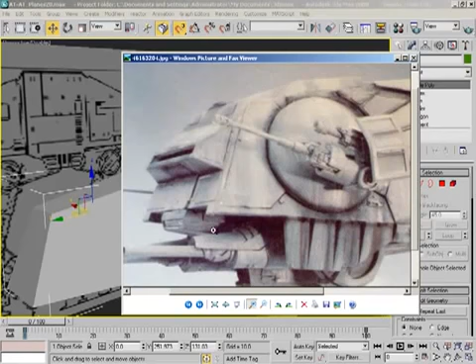So that's how I'm going to build it. We're going to build this one piece at a time, starting with the lowermost object and working our way out, stacking objects on top of it. That'll help give that sort of greebled, very Star Wars-y effect.

Let's start off by framing up on this thing. The first thing I'm going to do is hit the 4 key to go over to polygons, and I'm going to delete out this polygon here on the bottom. The reason I'm doing that is that if you look right here, there's kind of some walls to this box, but the underside of it indents inward.

And we can see that in other pictures - you can get an idea of it here. Here you can see that the underside of the head sort of recedes up inward a little bit, like these sides come down around the outside of it.

There's another shot I have right over here, where you can see the underside is really a plate that's recessed inward. So we'll create that a little bit later - for now, we're just going to worry about the overall shape.

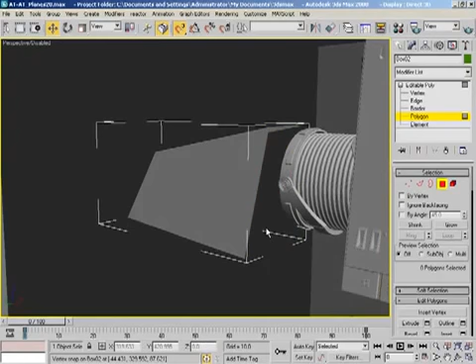We're also going to take out this plate. Let me take a look through some of my pictures here - we have the head, the main body. There's a specific one, I think, yeah, this one.

Here we go. You can see that this back wall is also a bit recessed inward. So what we're going to really focus on here are the plates that make up the left wall, the top, and the front of this thing. We're going to treat those all as if they were one piece.

Okay, so moving around to the front, let's go ahead and begin the modeling process. If we take a look at our various pictures, we can see there's a couple of indentations here, and there's a lot of different ways you can think of this. You could, if you dig back through the pictures, here's a really good one. You could picture this as one great big flat spot, and then this little central extrusion, it's almost like a center console in a car, just kind of bolted onto that. So that's the way we're going to model it.

So for starters, what I'm going to do is grab the cut tool. Let me also press F4 and get some pages out of my way. Let's grab the Mighty Cut tool, and I'm just going to make a split. I need to turn off snapping. Turn off snapping, thank you. All the way across the front, like so.

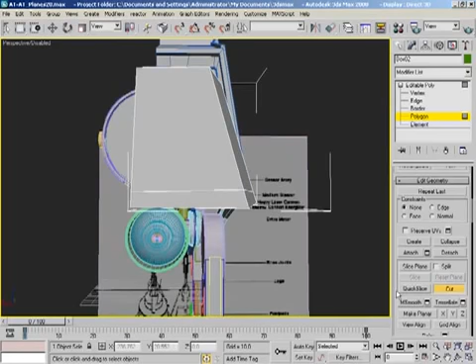Now, we need that to be nice and flat, and there's a couple of different ways we could do that. One way, like everything in Max, there's probably like 20 ways to do everything. We're going to grab this edge, switch over to vertex mode. Now, when I said grab this edge, what I meant was switch on edge constraints. So now, as I move this vertex, you'll see that we are indeed sliding along the edge. While I'm moving it in the z-axis, I'm going to tap the S key and then drag over here to this vertex, and that keeps these nice and flat toward each other.

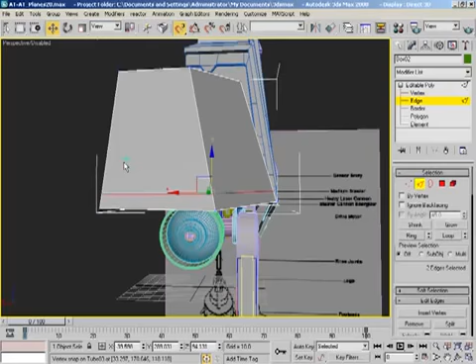Now, let's jump over to edges, and I can take this entire edge and slide it up and down a little bit. So we'll pull it down just a hair. Be really careful how we do that. Let me switch off snapping, and I'm going to deselect this edge. I just want to move the front one here. It's probably right about there. Take a look at our picture, we can kind of get a verification of that.

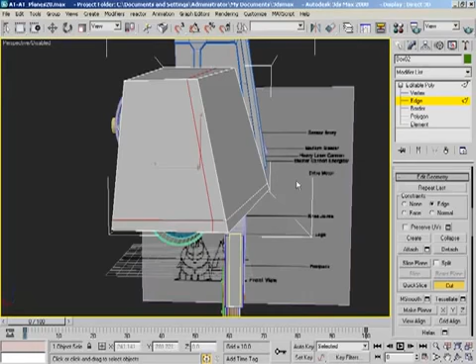So now what I'm going to do is make another cut, just goes from here straight across, and then let's just go ahead and run this all the way around to the back of the head. We can worry about the exact placement of the vertices a little bit later, right now it's not so important. We'll jump over to faces, turn off the cut tool, grab this face, and we can just delete it out. So we have our little indentation there at the front that we can work from.

Okay, so now if we consider that to be the outermost shape of the box, we can now start pulling back a surface to create the recessed area underneath the head. So let's jump back over to edges, I want to try something real quick.

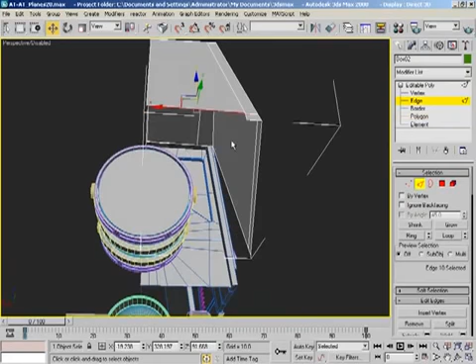Let's grab these three guys. So let's see, you, and you. And what I'm going to do is hold down shift and just drag backwards, and it's not going to work because I still have edge constraints on. And we'll try it again with edge constraints off. There we go. So that automatically starts to create the recessed area.

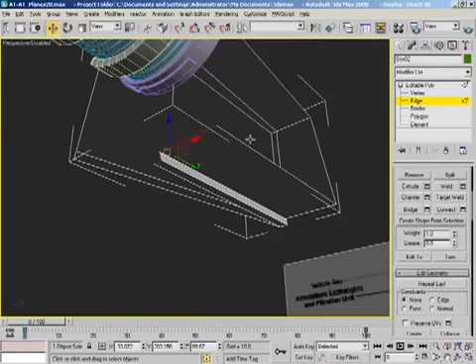It's just going to take a little bit of editing to get everything all back to where it should be. So for that, let's just grab these two edges. We'll slide them out. Actually, we could just pull them back toward this corner. That'll help get things kind of started anyway. It doesn't have to be exactly perfect.

But let's go ahead and grab vertices, and we'll turn on target welding, and I'll just snap that over like so. That's no longer perfectly flat, but that's nothing that a planarize wouldn't fix just a little bit later. For the time being, I'm not going to stress too much about it.

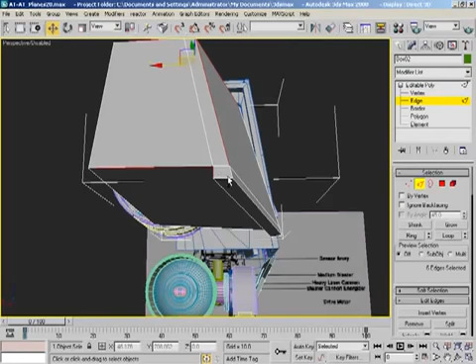So let's just focus on some of the plates that exist up here toward the front, little decorations and whatnot. Also, before we get too far along, let's also consider taking this leading edge here, this outer edge, let's see, these guys here, probably here and here as well.

And not to make things too complicated on ourselves a little later, I want to chamfer these. But considering it further, I'm going to do it a different way. We're not going to chamfer just yet. First thing I'm going to do is jump over to vertices, and sometimes I do this, sometimes I go back and forth. I have this great idea, and then it's just like, no, let's not do that.

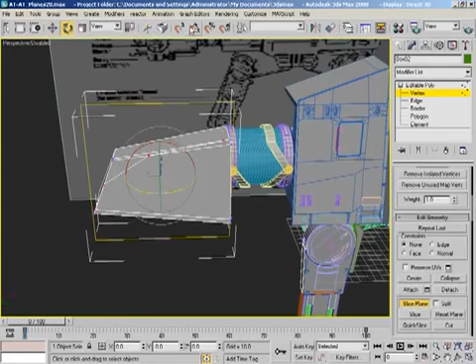Alright, now do we have angle snapping on? It's so much nicer to use this tool with angle snapping. And I'm going to jump to the side view. I'm so used to Maya, which follows the location of your mouse, and you don't have to click a viewport when you're moving stuff around.

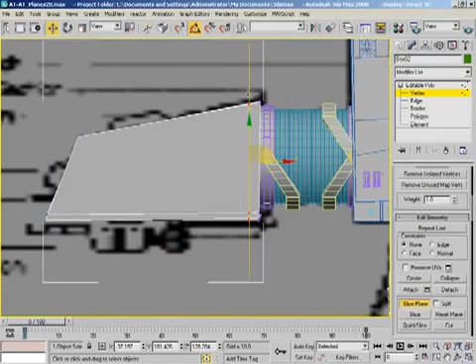Okay, so what I'm doing here is defining how deeply that recession toward the back of the head is going to be. So just to bring up the picture, there you go. You can see how this plate at the back of the head sinks in a little bit. With the slice plane here, I'm defining how far back that edge is going to be. So let's say something kind of like that.

And before I make my split, let's check in perspective what that's going to split and what it's not. See, there's a problem. So let's turn this off for just a minute. Let's grab this and we'll slide it back like so.

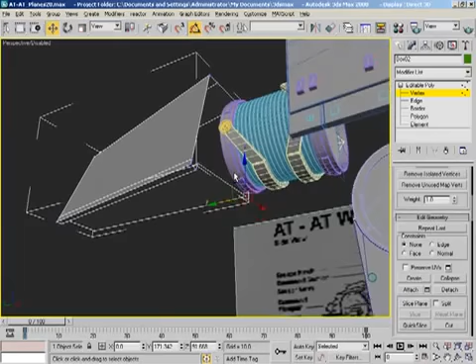Sorry, I'm contemplating. I'm thinking quietly and sort of out loud at the same time. It's impressive, isn't it? Let's see. Let's do this a different way.

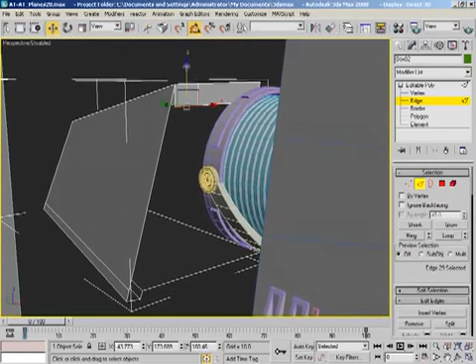I want these two edges, and I'm just going to shift drag them down a little bit. So that creates a little bit of thickness there. Now, this edge, all by its lonesome, I'm going to shift drag downward as well.

Now, it's starting to look a little bit weird, but don't get stressed yet. We haven't done anything that scary yet. We're about to. Let's take a look at our picture again.

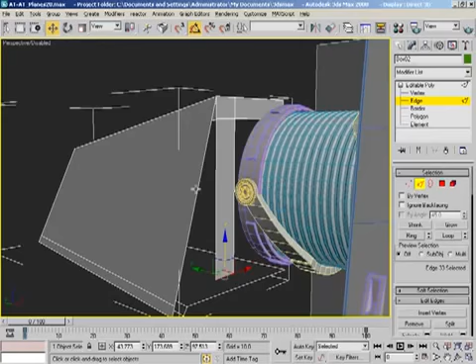Now, this whole thing is going to need to taper inward here at the bottom. That's very important. It's kind of an interesting feature, how the angle is beveled off down here at the bottom, and then it flows in down here. So that's something we will have to consider at some point.

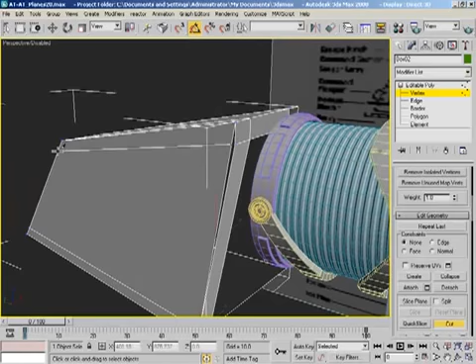For now, I'm just going to attach those like so. Let me grab the cut tool. And just split that right across. Grab target weld again. Alright.

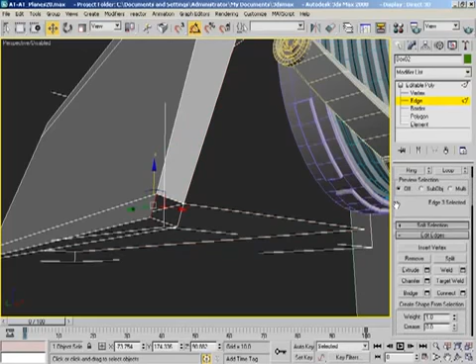Now if we switch to borders, we can grab, well, probably not those. We'll just switch back to edges. What I can probably get away with, if I just grab these two, I should be able to run a simple bridge command and fill those in.

Okay, now that's a good start, but I still want to go ahead and get the framework in place for the funny little inward angling. So let's go back to the slice plane for a minute. I'm not done with that idea, but we're going to do it in a slightly different way.

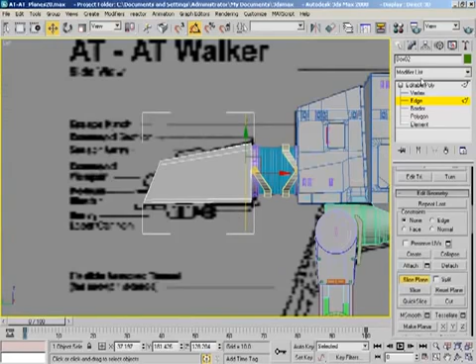Let's see here. Let's go to the material editor. Let me grab, make sure I have the right one. Let's grab the side view, and I'm going to render that with DirectX. It'll take a second to fire up, and it'll slow down my undos, which is kind of bad, but okay in this case. I just want to be able to see really well what's going on back here in the background. Now, this is where the image plane says that indentation takes place.

We could check on the side, and it pretty much corresponds. You also have to see this cool little indentation here, which isn't going to be shown on any kind of image plane, where this is all very thick and then tapers down. So we will probably have to make some adjustments to the overall head shape to make that happen. Probably, but until then.

So, okay, you can see here it shows this whole thing kind of slanting backward. I wonder if we can get that confirmed anywhere, because I don't really trust these image planes. Yeah, it looks to me like it doesn't really slant backwards so much. So that's okay. That's something we'll just kind of conveniently ignore, this little back slanting feature.

All right, now I'm going to pull this forward to, well, this would be one place to split or slice. So put a slice in there. And if we take a look at our pictures, that will help us right to that point, and then we need to go straight back from there.

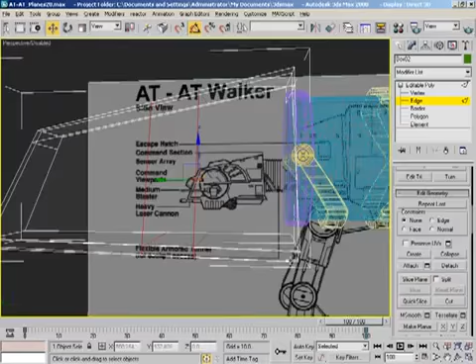Okay, let's just see. Well, we also need an anchor for where the whole thing's going to start, so another slice up here would probably be called for. Okay, with that, let's turn the slice plane off. Let's jump back out here to perspective. We're going to need some more slices as well, I'm sure. Take a look at some other pictures, kind of get an idea of the shape down.

Some cool differences from left to right. Also, it's funny, it really does depend on which version of the model you're looking at, because on some versions this edge looks really sharp, and on others it's not so sharp. So it depends on who you want to listen to.

Okay, so what I'm going to do for the time being, I'm going to grab these three pieces. Actually, I just tapped undo, and because I have a DirectX image plane in the background, it takes a second for things to undo. So let's go ahead and turn that off before I forget.

There we go, I want these guys. I'm just going to slide—oop, looks like we selected through. I just want to slide these guys out a little bit, so it starts to create that funny change in width.

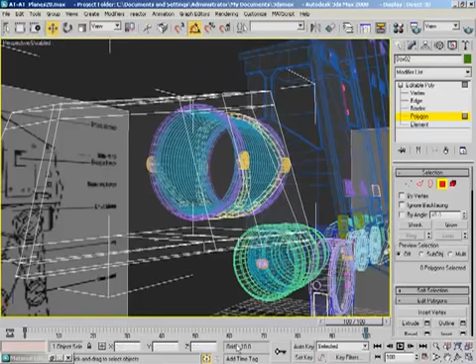So kind of shade things up, get an idea of where this is going. Okay, so now I'm going to make a split along here to kind of represent this edge, and then we can taper in what's going on down here. As a matter of fact, let me try something else.

Let's undo that. I'll make the split first. Yeah, a little bit of back and forth here. It happens.

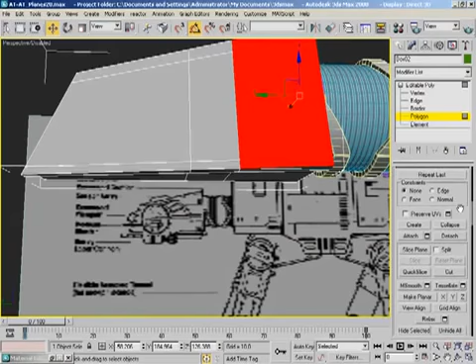Alright, there's a nice approximate cut for it. Let's double check here in the side view if we can. Press F2 to get rid of all that. It's probably a pretty good start.

I'm sure we could get away with going to edge mode. Let's turn on edge constraints and turn off the cut tool. We could probably slide this down just a little bit.

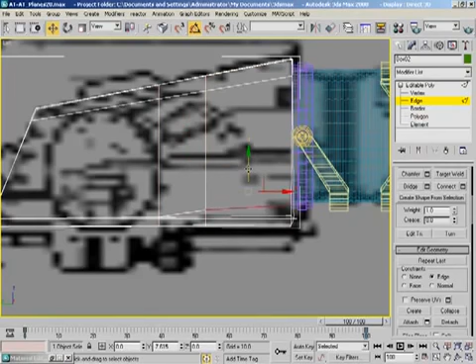Okay, now back over here in perspective. Let's try this a different way. We need to cut this, so make sure we split across there, because if we don't, this entire face back here on the back is going to get very, very messed up very quickly.

Alright, now I want this face, and probably these faces as well, and we're just going to slide these out. We need to turn off edge constraints before we try that.

Okay, and then let's switch over to edges. And we'll grab this edge and we'll slide it out as well, and turn this back into a straight line.

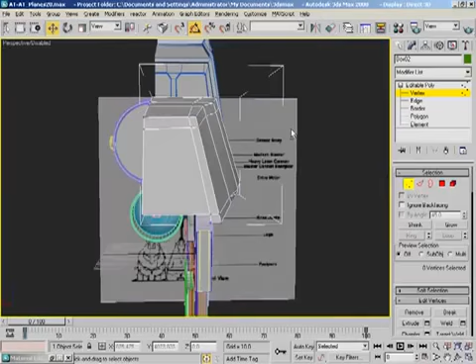Okay, let's shade that up. And we're starting to get that kind of general shape down, that sort of extruded area.

Okay, now back over here to our image. Let's go ahead and get a start shape, kind of a beginning shape down for this plate here. And something kind of interesting is happening where this shape that we just pulled out is really kind of separated—it's kind of its own thing.

So I think what I'd like to do is kind of cut it off of the base shape, but let's take a look at a couple of things before I confirm that. So here, that's kind of unified. And maybe not—maybe I'm on the right track by leaving it all kind of united. It's hard to say, really.

That looks like it indents inward, so I'm kind of glad that we have this indentation taking place. We'll probably need to run some edges lengthwise and start to shape out the indentation to get sort of that funny arc shape.

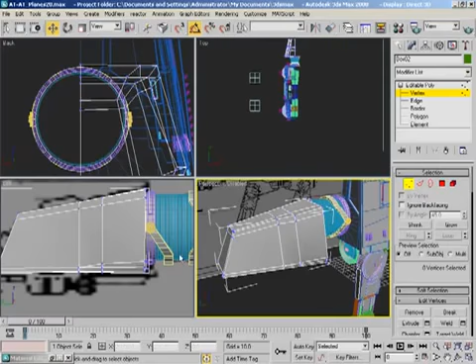That's alright. Alright, so let's see here. To start, if we wanted to make this plate, let me turn our image just temporarily back onto DirectX to give us a bit of a more solid guide.

And what I'm going to do is start off with a box. Let's go ahead and switch it to Auto Grid, and I'm just going to draw it something like so. Give it a little bit of height.

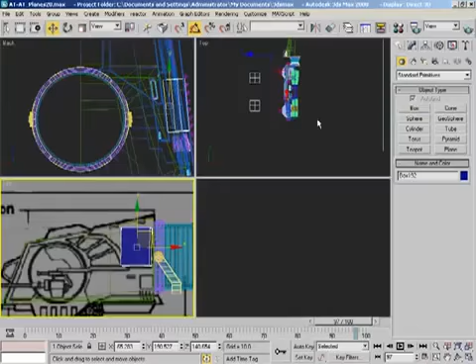So it's kind of stuck to the side. It's in the general area, but really, in the end, we're going to be... Well, you know what? On second thought, let's nuke the box. Let's just nuke it, I have another idea.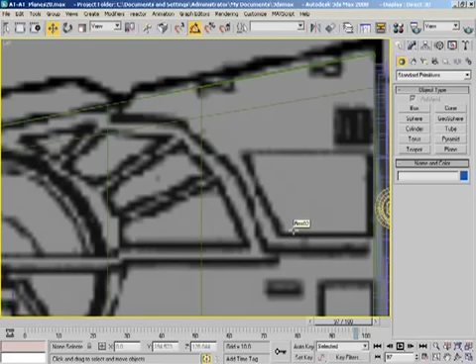Totally different idea—what if we carved this out? What if instead of pulling this the way we are, what if we actually chopped it out? It's kind of a different take on everything, but I don't know, I'm feeling like it might be the way to go here. And the reason I say that is because we already have an edge up here along the top. We have this row of faces that we could use to pull it out. We can make some cuts in here, and then basically turn the whole thing into an extrusion.

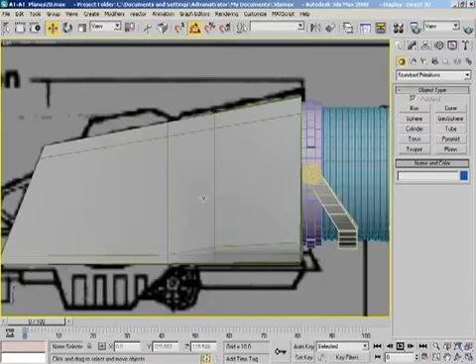Yeah, I think we're going to try that. You could really go either way. It's just kind of the mood I'm in, I suppose.

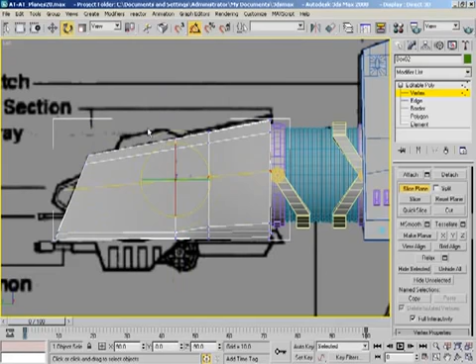There's not really much of an argument for which way is better than the other, because it really just depends on how you wanted to model it. Especially with the idea that this is going to be an underlying shape used to create a normal for a much simpler version of the model. It's really kind of up to you how you handle it.

So let's put a slice in here. It'll just kind of help us reshape this whole thing. It might even be a good idea to drop in a second slice.

That's how it goes sometimes when you do something off the top of your head. Sometimes you kind of know what you're doing and everything just kind of flows like you had it all planned out, and sometimes you kind of make it up as you go.

I don't know if any of you have been watching the modeling on the fly from other series. There was one for the Suzuki SV650S motorcycle where I had modeled out the gas tank and then ended up completely destroying it and starting over. It was great.

Alright, give me a nice shot of the side of this thing. So what if we wanted to extrude this out? What shapes do we need in place? It looks like we've already got a good start.

I still have edge constraints on, which I think I'm going to undo, and switch that off for a moment. I don't know how well this is going to work, because I'm always a little bit untrusting of these constraints to a certain degree, but let's just try face constraints. I'm just going to try shaping this out very generally.

I will probably need another split. Let me just grab the cut tool temporarily. Make a nice cut through here.

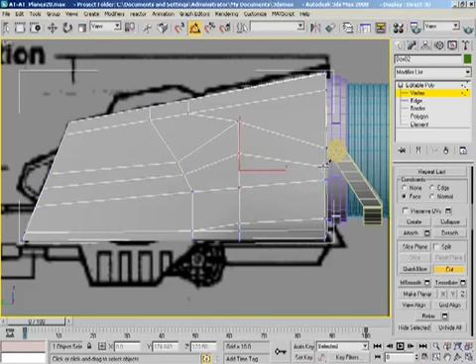Okay, now, if we jump over here to perspective, I need to start really cleaning this up. So grab this face. Is it going to snap that edge, or is it going to start getting really wonky on me? Yeah, very wonky. We don't want that. So let's undo that.

And I need to turn off that DirectX feature, which was cool for a minute, but if we don't need it, reach in here and switch it off, because you lose a lot of speed on your undos while that's on. Alright, so let's turn on edge constraints for just a moment.

Slide this up like so. Slide this up like so. Slide this up again as well. What I'm doing really is I'm outlining the shape that we need.

If we come over here to our image, we have the little tiny lip at the front, then 1, 2, 3 edges, and then straight back. So here we have the lip at the front, 1, 2, 3 edges. So we've got everything we need. We just need to get it all arranged.

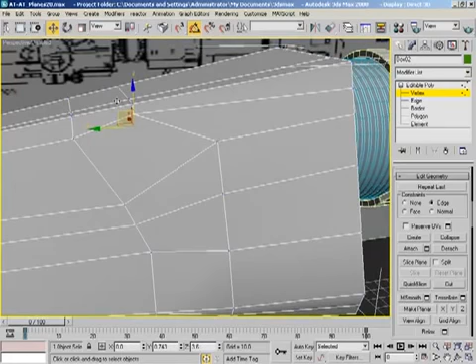So a couple of things while we have edge constraints on. Let's slide this up to thin it out a little bit. We can slide this out a little bit.

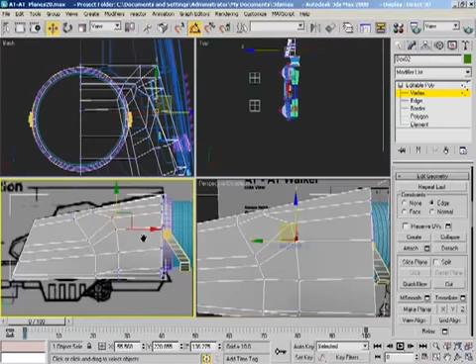What we probably will need to do to make this nice and easy for ourselves would be to come back over here, make this back into a DirectX view, give that a second to update, and we'll close the material editor. Let's jump over here to the side view, thin things out real quick.

Now, I'm just going to start slinging some vertices. I'll leave constraints on for this one cut, and it looks like we can leave them on here as well. Now, you can do things like this.

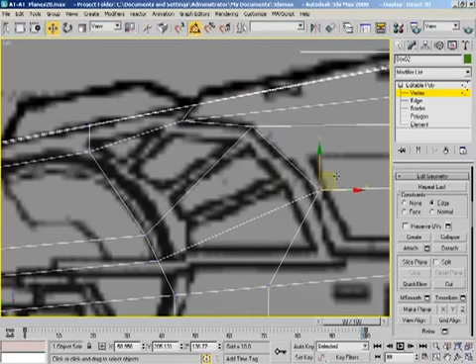Notice I have edge constraints on, so what I'm doing is I'll slide this back until this edge intersects at the point where I want the vertex to be, and then I can slide along that edge, and it puts it right into position. So we'll do that again. We'll slide back until the edge corresponds right where I need the vertex to be, and then slide the next one up. And then same thing here.

We'll just slide this guy back, and then slide him up, and slide this guy up, and slide this guy up, and I'm just starting to kind of clean up the overall shape a little bit. Now that's a really long triangle right there, which I generally am not a big fan of.

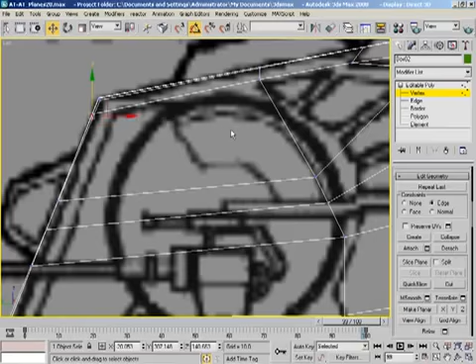And some interesting things going on with the shape. So we're going to pull this upwards a little bit. We'll slide these guys upwards, kind of start straightening out the overall design here. Could probably slide this upwards.

You got to remember, this is going to be straight outwards, like it just comes straight forward. This doesn't taper at all. It looks like some sort of mount to which the gun will be applied. And somewhere around here, I actually have a picture of it with the gun broken off. I think it came from some model kit.

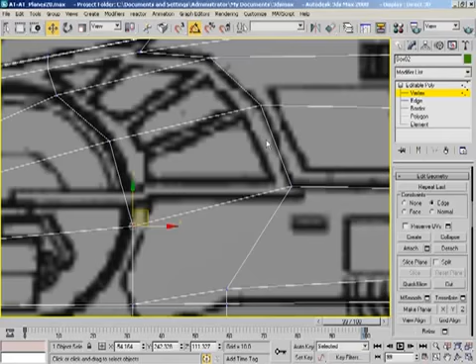There you go. So right here, the gun's been removed. And you can see how this piece doesn't, in fact, taper. It just goes right into this dome-like piece that we've got to still create. Let's see if we can get a rough of that in by the time this video is over.

But the rest of this all kind of indents, so we're getting the pieces in place so that we can make that indentation fairly easily. Now, some of this isn't lining up quite the way it probably should. So we may need to kind of take a second look at how all of this is indenting down here.

Let's just shade everything up real quick. Have a quick look. Probably, I'm sure we'll actually need some edges to help give this the exact form that it needs. Like we'll probably need to run an edge up to here, something like that. So we've got a good start. Let's take a look at some pictures.

So a best case scenario would be to chop out this entire surface here, or get an edge along that. Let's come over here. We've almost got one, don't we? So pull that down, excuse me. And we could probably assume that that indentation starts somewhere around here.

Might be able to double check that. Yeah, the part where this starts to kind of go underneath, where this whole area starts to push inward, technically away from the camera where we are right now. It all begins right about here. So that's a pretty good spot for this to be. And the indentation pretty much goes straight down.

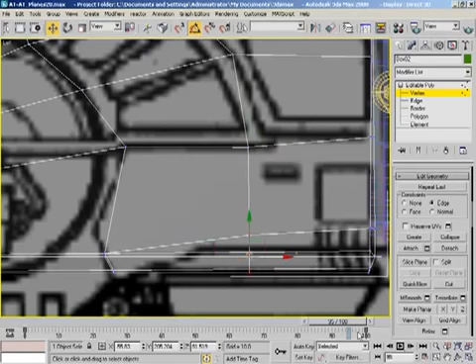So what we need to do is grab these guys and pull them straight back. So the shape that we have here in the image plane mostly reflects what's going on, from what I can see, but not exactly.

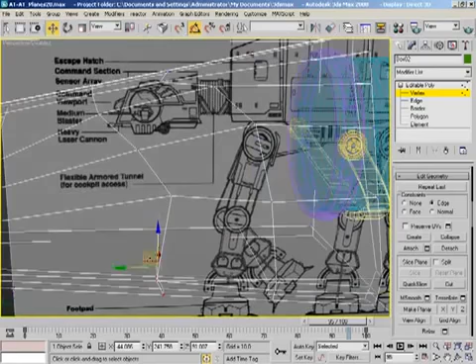Let's see. Now, we need some sort of edge to kind of anchor off where the indentation ends. It looks like we kind of already have one. The question's going to be whether or not it's indented as much as it needs to be. We probably won't know that until we get some sort of a piece in there. It doesn't look like it indents very much right now. Let's just try, kind of on a temporary basis.

We can do a few things. One, I want to grab some faces here, here, here, here, and here. And I want to extrude these. Let's go by local normal. Actually, let's try, yeah, by local normal, not by polygon. And that's pretty heavy, so we just want kind of a thin outward pull like so.

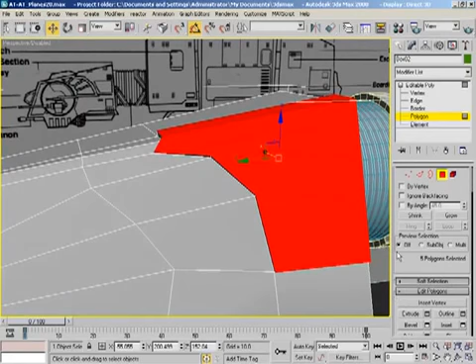Now, of course, we mentioned earlier that the top of this will need to be rounded, and that's okay, pretty easy to do. There's going to be some cleanup of these edges. Goodness gracious. Alright, so I'm just going to split this across to the top, and we'll split this up to here, and like so. And then to keep things kind of nice and neat, noting that there will be some cleanup.

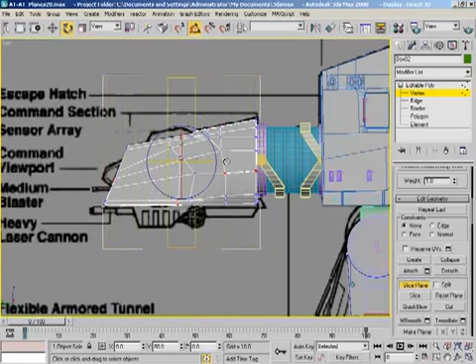Let's grab the slice plane, and I'm going to reset it. Grab rotation, and let's rotate it in Y 90 degrees. Move it back to about here, and do a slice. And move it back to about here, and do another slice. And we'll turn that off, jump back over to perspective.

And now we have some edges that we can move in order to get that rounding in place. And it looks like that rounding's pretty subtle. So what I'm going to do, make sure we're not cutting anymore.

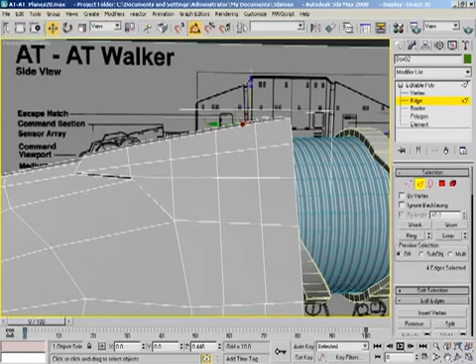Let's do it this way. I'm going to grab all four of these and pull them up just a little bit. Now I'll deselect the one in front and pull the rest up just a little. Make sure you actually have the handle selected. There you go, I'll pull those up. And then it looks like here we can just pull this guy up a little, maybe push this guy back down. And it's creating some really gentle rounding right up there on top.

Now it hasn't been beveled, hasn't been smoothed out, but yeah, the basis of it is there, and that's always good.

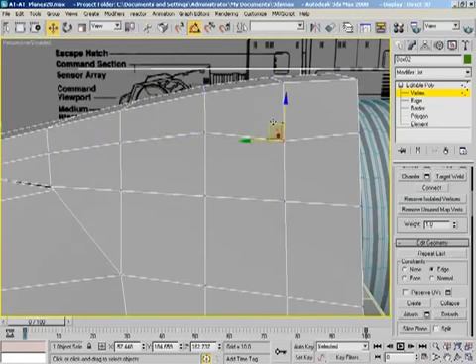I'm wondering if this whole thing needs to be pulled out just a little bit more. We probably will have to pull it out a bit, but I'm going to try to hold off for a little while longer. Let me jump over to vertices, and I'm going to do some things mostly just to keep things nice and neat as far as I'm concerned. So make those edges kind of go into a little bit of curvature before we get to the more straightened edges down here. And that's okay, I think this will do.

We could probably get away with jumping over to edges. Let me turn off edge constraints for just a moment, and I want to grab all of these edges here along the inside, because that extrusion doesn't pull out evenly when you get to the corners. What I'm going to do is pull all these guys downward just a little bit in Y—or Z, I'm sorry, it's a Z in Max—and get those a little bit more flattened out.

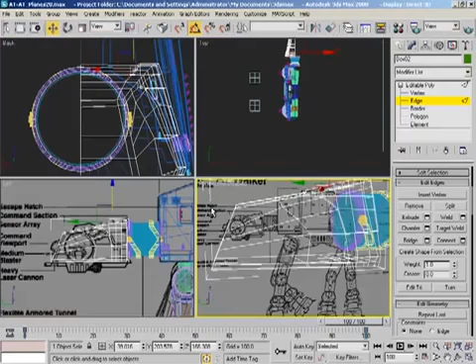Okay, so back over to our picture. We've got this piece that's going to kind of creep out from underneath and then come over into the big circular shape. So what I'm going to do real quick is get that circular shape. We'll come to the side view. This is going to be interesting. Let's go over to Create, and we'll create a sphere.

And we could do a hemisphere—there's a lot of different ways we could do this. Let's just try it like this. I'm going to grab this, pull it out. Now, AutoGrid was on, so you'll notice our sphere has kind of an interesting tilt to it. I'm going to try to use that to my advantage. See how crazy that looked—actually, it did pretty much exactly what I wanted it to.

Okay, so we could start off just by doing some chop on it. We could chop it to right about there. And before we get completely out of the object, let's pull up its detail, let's say to about 42 segments. That kind of rounds things out a little more.

Chopping is going to be better than squashing in this case. So if we called it there, it's lining up pretty well. And of course we can resize as we need to. Let's jump back over here to perspective.

Let's convert this over to an editable poly, and let's grab vertices. Grab the scale tool, and then we'll set over to local. Actually, what if we set to parent? What's that going to do? Well, not what I want it to. Let's go to use pivot—there we go, there we go.